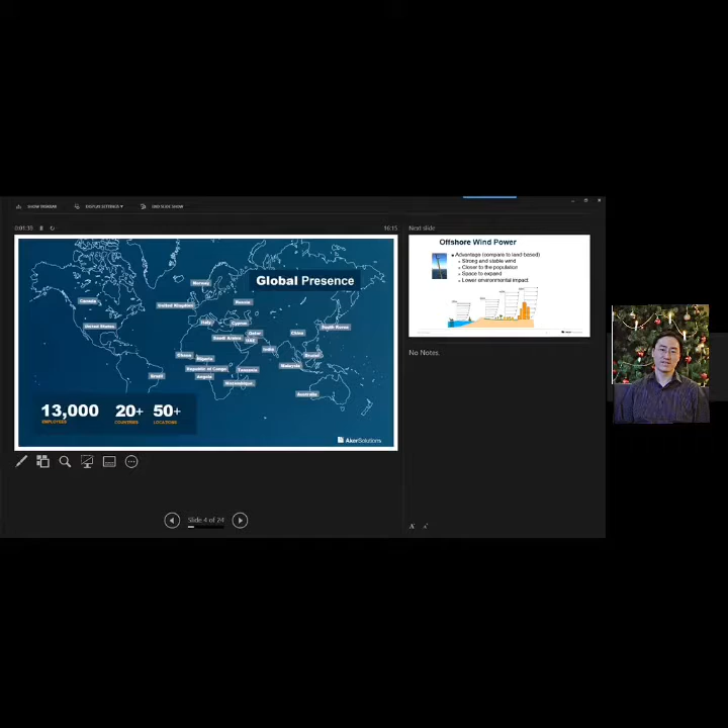Throughout our history of 180 years, we have 2 backbones. One is marine and the other is mechanical. And we can survive such a long history because we try to optimize and adapt to new environments. And now we see that offshore wind is a future trend. So our vision is to be a leader in forging a sustainable future for the global energy industry and the world. We currently have 13,000 plus employees located in more than 20 countries in 50 plus locations worldwide.

So why offshore energy? Because compared to land-based wind energy production, there are several obvious advantages, and also some disadvantages as well. So I just list some of the advantages. Offshore, the wind is much stronger than onshore. As you can see in this picture, just 10 kilometers from the shore, at a height of 250 meters above the sea surface, you can have the same wind speed as 400 meters in the suburb. Which means to get the same energy, the height of your wind turbine tower can decrease by 150 meters.

And also around 80% of the population is located within 200 kilometers from the shore. Which means the majority of the population can benefit from offshore wind power, because a significant part of wind power is grid cost, and if we can be close to the source, we can save a lot of electricity transmission fees. And also offshore has a lot of space to expand.

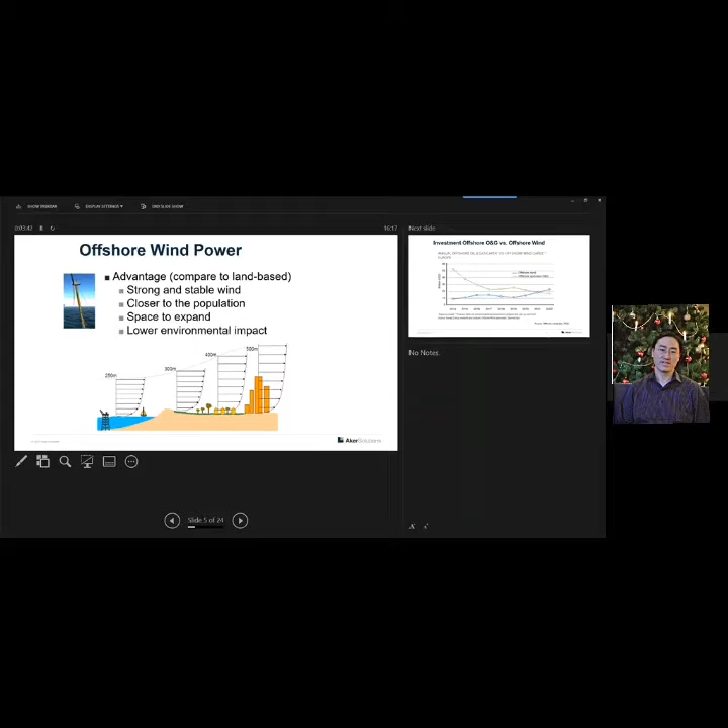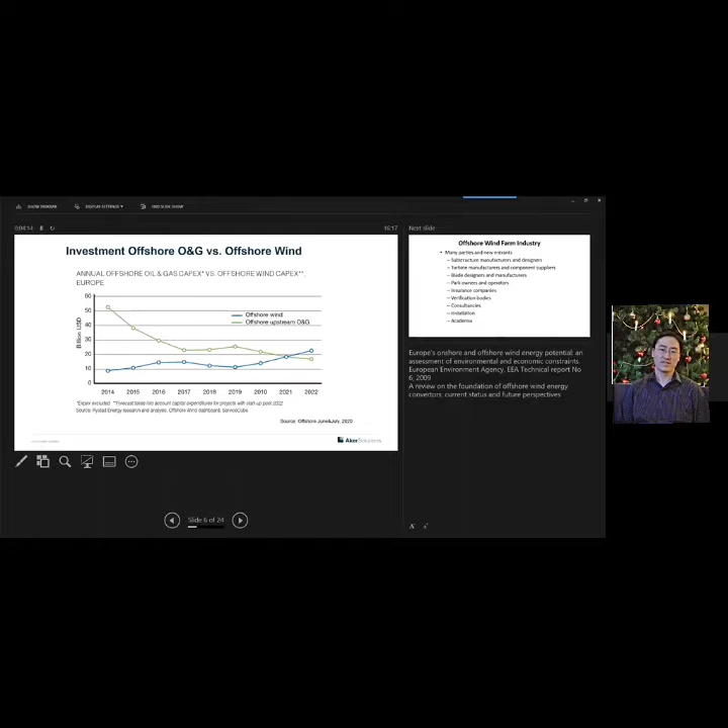And this shows the trend of investment in offshore oil and gas and offshore wind. As you can see, from this year, offshore oil and gas upstream began to go down, and will even be lower than offshore wind investment. So that's one of the main issues that Aker is facing, and we are going to spend more effort on the offshore wind part.

So the offshore wind farm industry actually involves different stakeholders, like the substructure manufacturers and designers, turbine manufacturers and component suppliers, blade designers, like we have several big ones in Europe, like Vestas and Siemens.

Also the park owners and operators. Insurance companies can be a very important part of developing the offshore wind business also. So consultancies, big or small, and installation is a very significant part with regard to the engineering for offshore wind

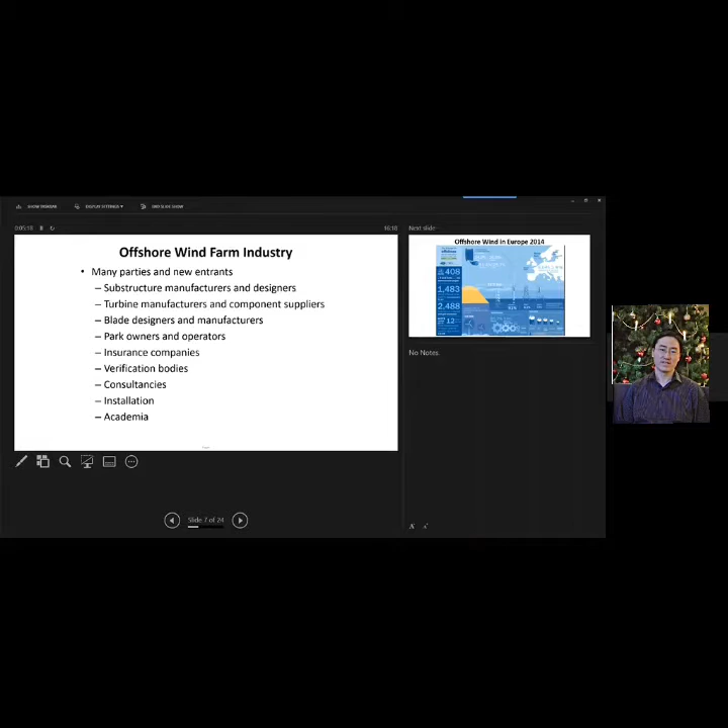development, also academia, because Norwegian academia is one of the first in the world to be heavily involved in the development of offshore wind. So they have contributed enormously to the new knowledge for this part of the business.

So the offshore wind in Europe, because I'm a structural and geotechnical engineer, I'm talking about the foundations. The majority of foundations in Europe or in the world so far is the so-called monopile, which means a single pile foundation penetrated into the soil and further up connected to the wind tower. The tower can be 100 or 200 meters high. This holds the wind turbine.

And now we see the trend that there are more and more jacket type structures, as you can see here, because as I will talk about later on, there is a strong demand to have large wind turbines because an offshore wind farm needs to have as few foundations as possible. So we have to reduce the foundation number but increase the power generation of each wind turbine. That's why we have to use stronger jacket structures rather than the monopile.

And also jacket structures are adaptable to different soil conditions compared to the monopile. In Europe, monopile may be okay because the majority of the seabed soil condition is very good sand. But if you go to Asia, especially South and East Asia, there can be very difficult geotechnical conditions like very deep mud. So you have to use other types of foundation. Jacket is a very good target for that.

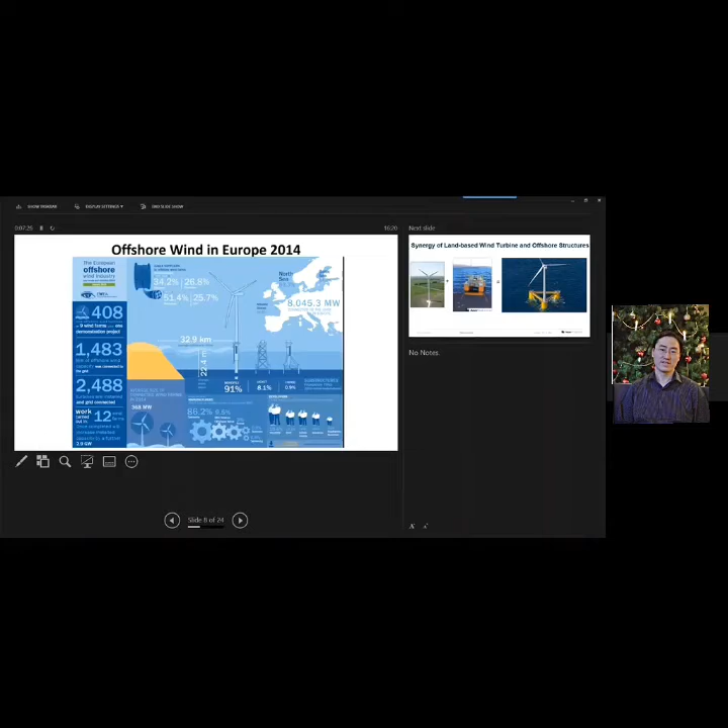There are also some other types of structure like the tripod, but because its redundancy is not that good, its application is limited. Yeah. So from onshore wind to offshore wind, it's actually a synergy of the land-based wind turbine business and offshore engineering together. But there are certainly differences between them, and also some new knowledge.

Like for the offshore oil and gas business here, we normally develop a single offshore platform. It's like tailor-made. But for offshore wind, we have to develop maybe 5 to 10 or even 100 turbines. It's not tailor-made. It's sort of like mass production.

And also, for example, the dynamic loading for offshore engineering structures is less adverse than for offshore wind, because there is more dynamic loading here, especially regarding fatigue, because under repeated loading the material can break at a rather low strength compared to the material strength of steel. That's because of these cyclic loading effects. So fatigue is a major concern.

For offshore wind, there may be 10 to 100 million cycles of fatigue loading during the service life, compared to only 1 or 10 million cycles of fatigue life for normal offshore oil and gas structures. That will be a significant fatigue problem.

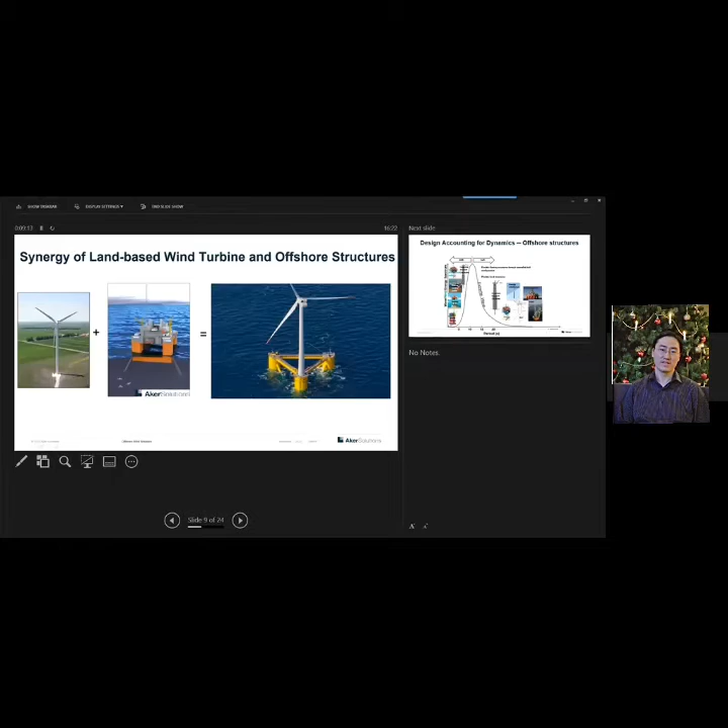Regarding the dynamics, as you can see, for example, this is the energy spectrum of the wave loading. And you will see many fixed bottom offshore structures are located on the left side, which means they try to be very stiff to avoid resonance. And many flexible floating structures are on the right-hand side. The major concern is to avoid resonance with wave loading.

But we also have a very high occurrence of fatigue waves, which means very small amplitude waves, which can cause what we call semi-resonance of the offshore structure. And that's why one important part of offshore engineering is to work on mitigating the fatigue damage for different types of structures and foundations.

And also we have wind loading. This is actually low frequency or high period loading, which can also trigger different resonance problems for the floating structures. That's actually a big concern for offshore structures, not only for the offshore wind substructure, but also for offshore oil and gas structures.

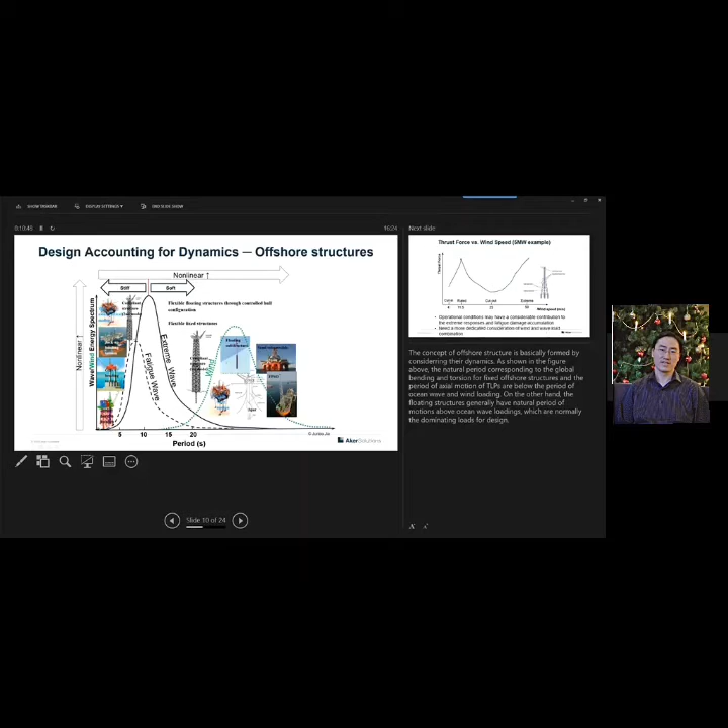So the dynamics plays an essential part for offshore engineering, especially for the structure and foundations. And also different from offshore engineering, for offshore wind loading, as wind developers know, it's not necessary that the maximal loading occurs at the maximal wind speed, because at the rated wind speed, for example around 12 meters per second, the wind turbine is optimized with pitch control to generate the largest electricity output. The dynamic thrust force can be even bigger than extreme wind loads in many cases.

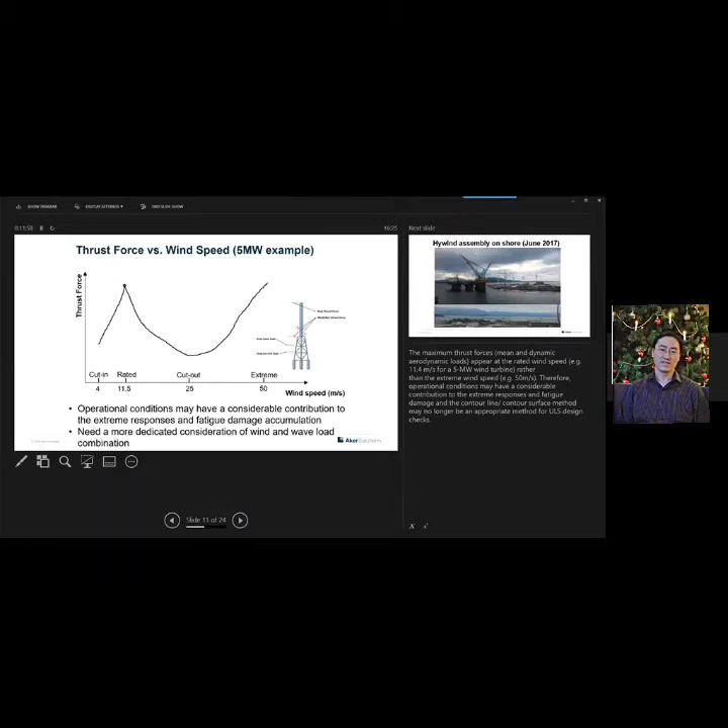So this means that operational conditions may have a considerable contribution to extreme response and also the fatigue damage, as I have mentioned, and they need a more dedicated consideration of wind and wave load and how to combine them. That makes a very different situation compared to normal offshore oil and gas. And this is one picture I took.

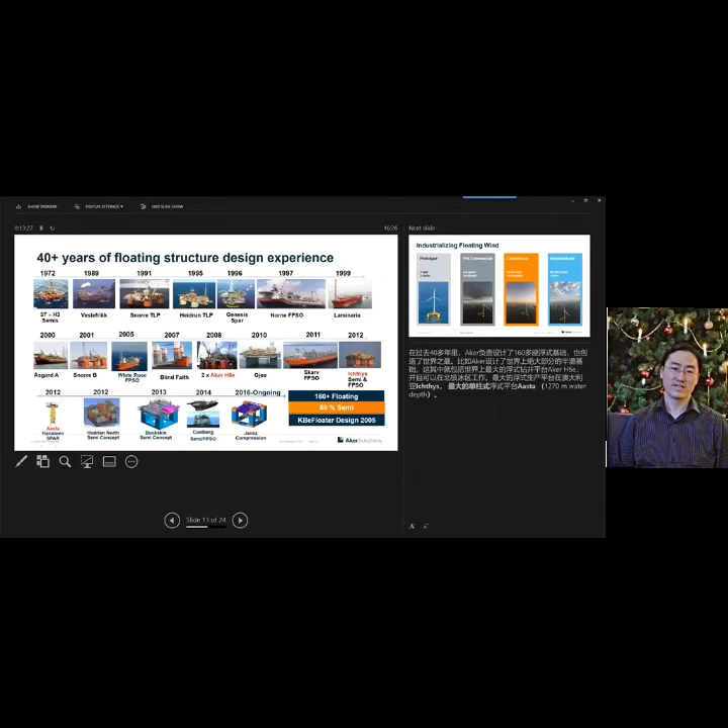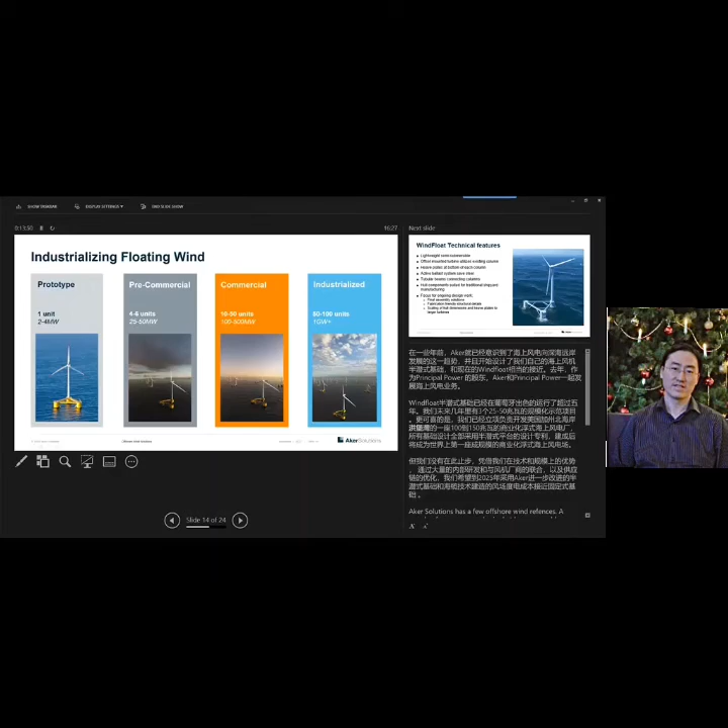Aker Solutions have more than 40 years of experience on floating structure design. That's actually one of our focuses to develop offshore floating wind. We have developed so far the largest drilling floating platform, Aker H6E, and also the world's largest FPSO in Australia, and the largest spar floating structure called Aasta in the North Sea. And our focus now is to commercialize some of our concepts of floating wind, and we are actually between the pre-commercial and commercial stage for different projects in the world, both in Asia and also in North America and Europe.

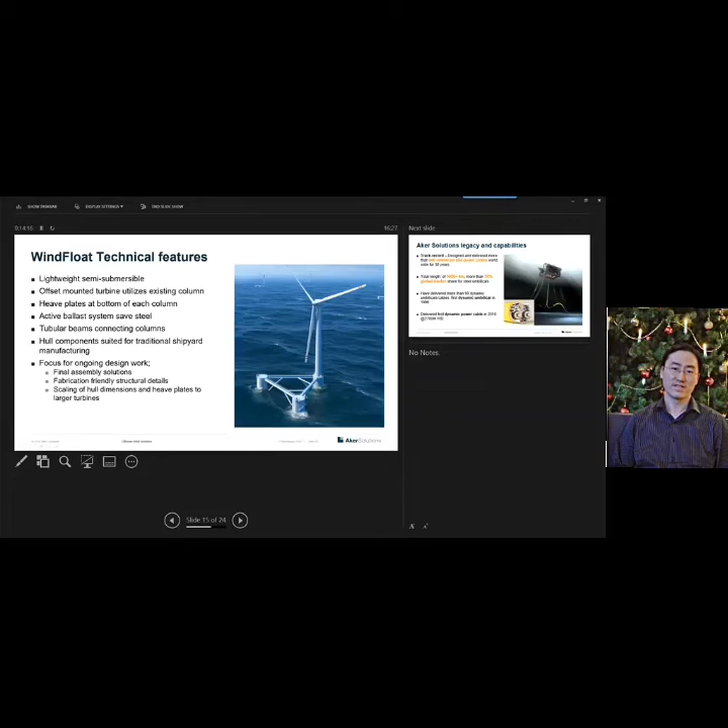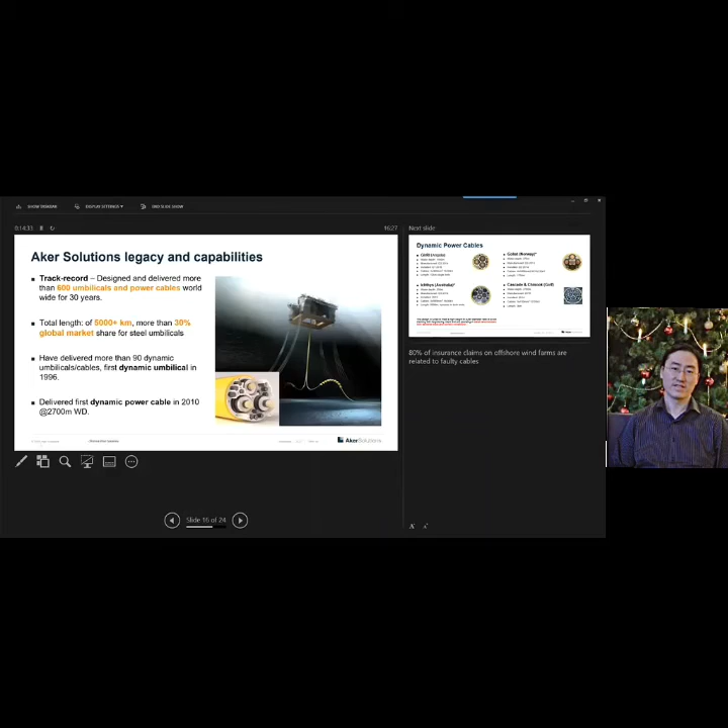And this is one of our aligned partners, Principal Power, that developed this WindFloat, which is very famous because of several important things, especially this active ballast system that allows you to put your wind tower and turbine in one of the columns rather than in the middle. That saves a few hundred tons of steel. And we also provide services for the cable. We have so far delivered more than 5,000 kilometers of steel umbilicals in the world, which is around 30% of the global market. And these are some of our projects in Norway, in Africa, in Australia, in the US, and we have also developed that to Asia, mainly in China.

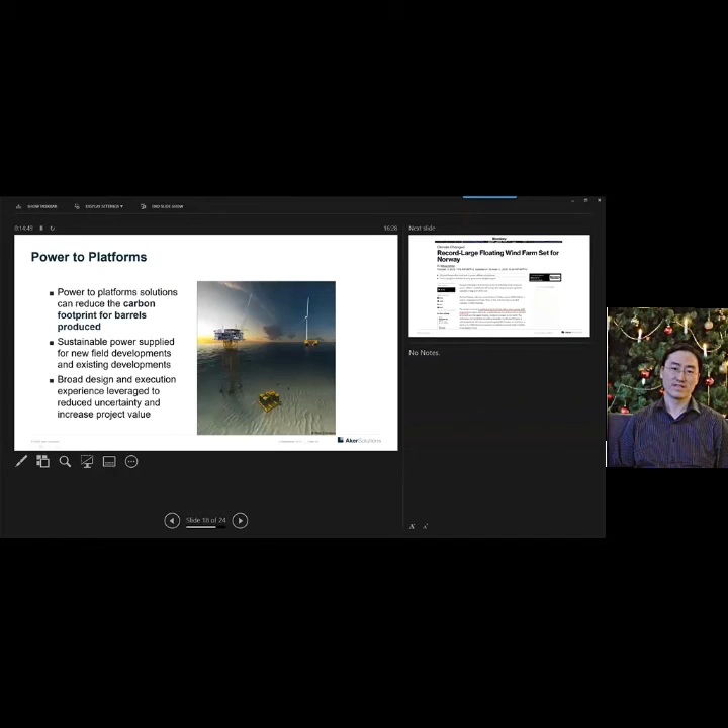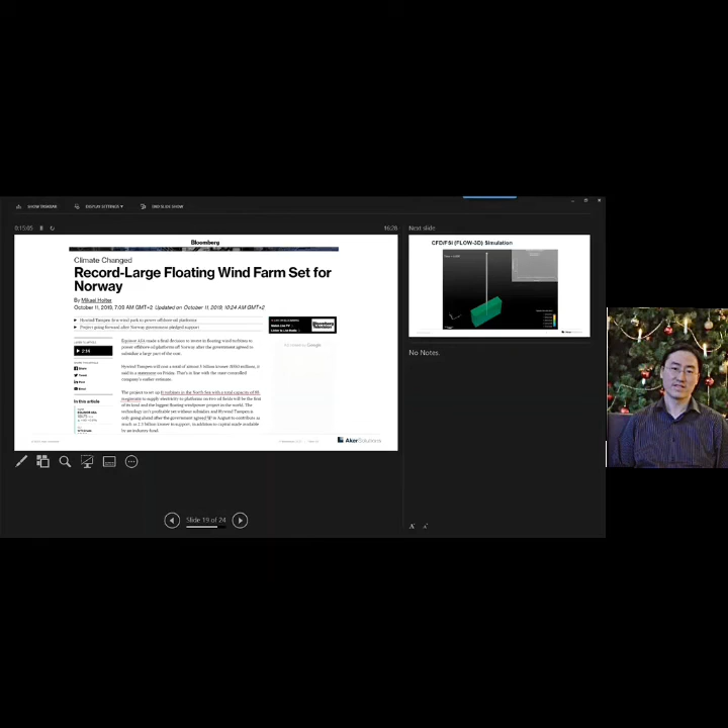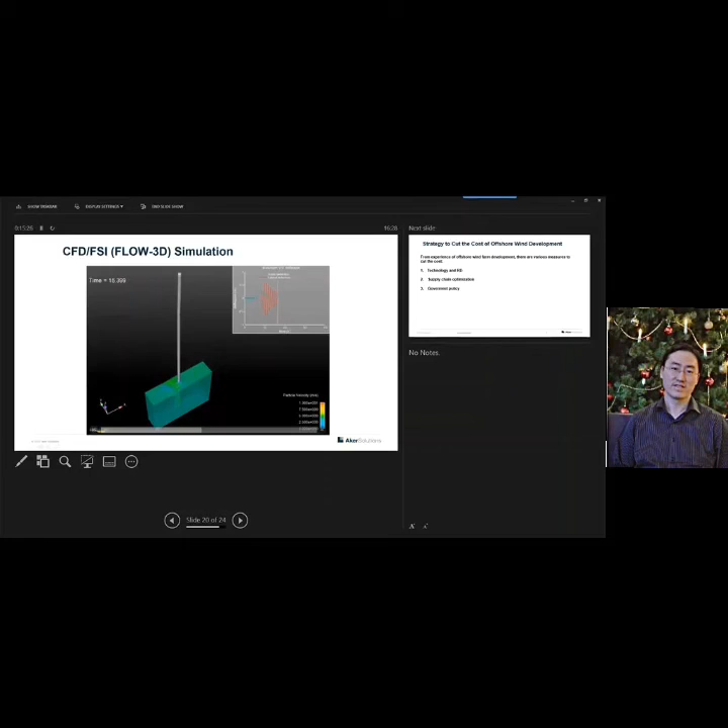And now we are involved in power to platform development. One of the things maybe you have heard of is Hywind, with 11 wind turbines installed at a total of 88 megawatts to provide electricity to the offshore oil and gas platforms in the North Sea for Equinor. We have been involved in that. And this also shows some of our refined analysis for what we call vortex-induced vibrations. We use very dedicated CFD software to simulate that. Without those efforts, you can never reach success in the development of offshore wind and the offshore engineering business.

Yeah. So for the strategy to cut the cost of offshore wind development, we have the technology part and research. We have the supply chain. We need mass production to commercialize, and also government policy support is very important. Because of the time limit, I don't have time to talk further about that.

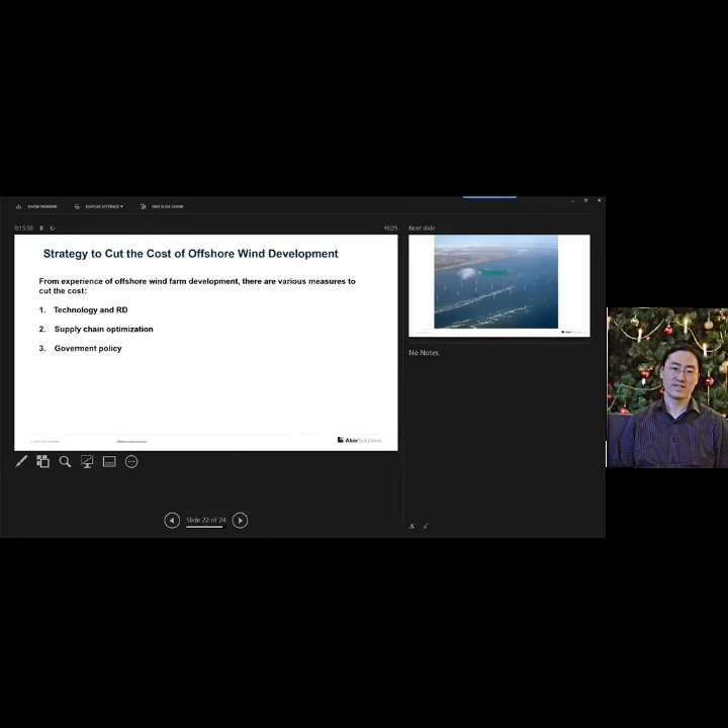Dr. Jia, that is very interesting to hear about the offshore, because I guess at the moment in Sri Lanka we only have onshore, but obviously, as you mentioned, it's probably more environmentally friendly. So yeah, there's quite a long coastline in Sri Lanka, so it's a potential future there. Thank you. Thank you very much.